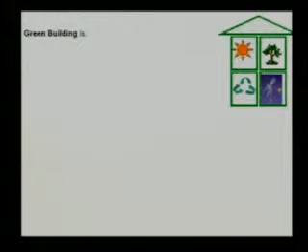That's not the same as green building. Green building is increasing the efficiency of building resource use, that is, using less energy to do the same thing, less water, reducing the impacts on health and environment through the life cycle by improving siting, design, construction, operations, maintenance, and removal. In other words, green building is only one part of sustainability.

The big dog, the 600-pound gorilla in the United States, is USGBC. They have the LEED certification system. It covers a number of different types of certification. The one most relevant, surprisingly, is new construction for the repair industry. One might think existing buildings, operations, and maintenance. That's not really true. That deals more with how the building operates as it goes along, less to do with changing things in the building, which is what we do with repair. Again, they deal with sustainable sites, water efficiency, energy, innovation in design.

Bear in mind, LEED from USGBC is a green building certification system. It's using strategies that are designed and built to improve the performance. And concrete is a pretty darn green material when all comes down to it.

Portland Cement Association put together this nice little summary. We create sustainable sites with concrete. We have good thermal mass and infrared reflectivity characteristics. We can use a lot of recycled materials. We produce it locally, and we are extremely good at durability in that it doesn't rust, rot, burn, survive floods, and vermin don't get at it very easily.

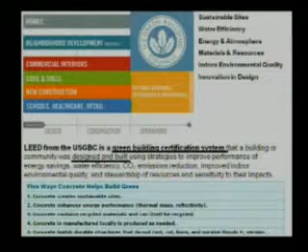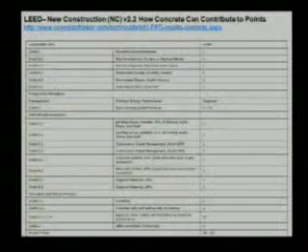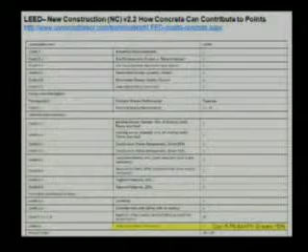These are good things, but if you look at the LEED certification system for new construction, and this is my opinion, not that of my employer or anyone else, if you use a LEED accredited professional, you get 1 point, but the use of a LEED system, LEED certification, tends to increase the construction cost 5 to 7%. On the good side, that has a net present value of greater than 50% after 20 years. It takes a while to get your payback, that's what it's saying.

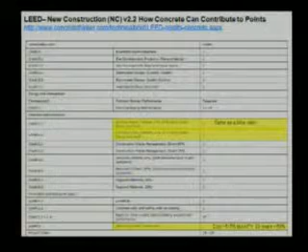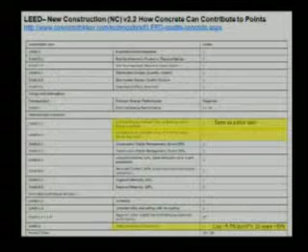I get a point for reusing and maintaining 75% of existing walls, floors, and roofs. I get the same number of points by putting in a bike rack. I can get another point by reusing and maintaining 95%. Durability, I can get 1 point for durability. That's the same as putting in showers in a changing facility.

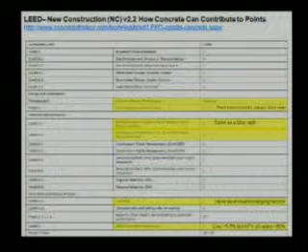Let's see, energy performance. They do give points easier for renovation than for new construction. This is good, and you can get up to 10 points. By carefully managing construction waste management, diverting 50% of it for reuse, you can get the same number of points as you do for using renewable resource wood.

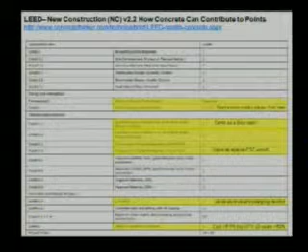And if you apply for credits demonstrating technical performance, you can get 2 points. But bear in mind, you're dealing with another bureaucracy that's always changing its rules. It's not to bash LEED. It's a good system. It's just not especially favorable for the repair industry.

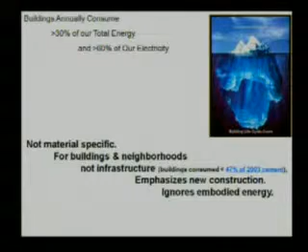Buildings do consume a huge amount of our energy, even more of our electricity. LEED is really for buildings and neighborhoods. A lot of our concrete goes into infrastructure, which it really doesn't address directly.

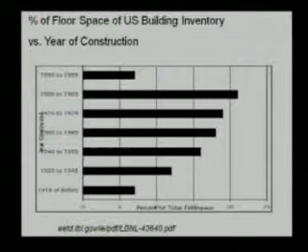Looking at buildings, the percentage of floor space of the U.S. building inventory, that's how many structures are built, how many buildings, versus the year of construction. We built a lot of stuff that's still around in the 80s, a lot of stuff still around in the 70s and in the 60s. In other words, there's a lot of older structures.

How do they consume energy? This gets really interesting. I know this is a busy little table, but heating, cooling, ventilation, and so forth. Well, back in 1920, they didn't use a lot of air conditioning, so they're very efficient when it comes to cooling. You opened a window. Heating, a lot of them used oil heat, less efficient.

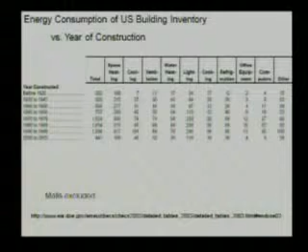And this excludes malls. But if you look at the energy consumption, this is graphing out the totals from the chart in trillions of BTUs versus the age of construction. The energy hogs were built in the 90s, the 80s, and the 70s. In other words, older structures don't always consume a lot more energy.

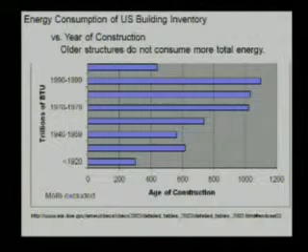Another way of looking at it is delivered energy. This comes from a different source, so the numbers don't exactly align. And throughout the presentation, I've included a lot of links. If you want to go check the facts, if you want to go do your own research, this is an encouragement to do so.

The million BTUs per square foot versus the year constructed. Again, it comes back to the energy pigs are right in here. That's showing it graphically. Until we get to the year 2000, buildings built prior to 1960 tend to be more energy efficient.

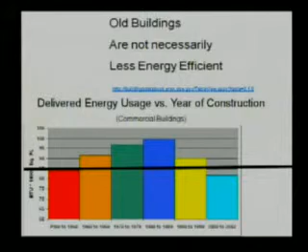Historic preservation. There's a lot of very interesting facts about this. I highly recommend reading a book, The Economics of Historic Preservation by Donovan Rypkema. You can get tax credits for doing historical restoration. You can increase the property values. It's more labor intensive. It's more specialized to do historic restoration than new construction.

Higher skills are required. Guess what? The folks that are doing that are spending the money in the community where they're doing it. They're local labor. So you get a big bang for helping the local economy. You also can create the opportunity for heritage tourism. When you go somewhere on vacation, do you go look at the latest and greatest, newest shopping mall? Maybe you do, but you also tend to look at the things that were built 200 or 300 years ago. That's what's interesting.

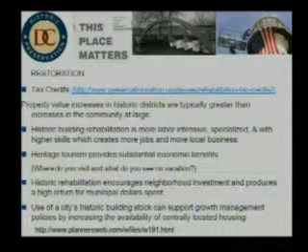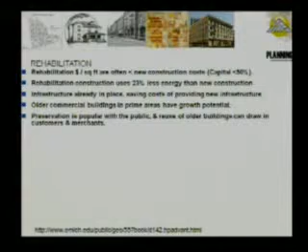There's a high rate of return for doing historic rehabilitation. Furthermore, rehabilitation in many senses is less dollars per square foot than new construction costs. It tends to use less energy than new construction, according to the University of Michigan. Your infrastructure is already in place, so you're not having to replace sewers and electric lines, water supplies, roads. Preservation's popular with the public. It's easy to get tax dollars voted for it.

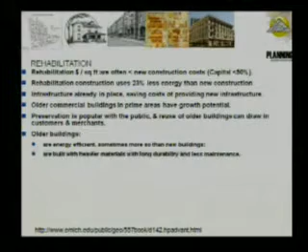Older buildings are more energy efficient. They're built with heavier materials, and they've survived the test of time. They've been there a while. It means that design worked. And a lot of other facts. It instills pride. It saves on maintenance costs, especially longer term.

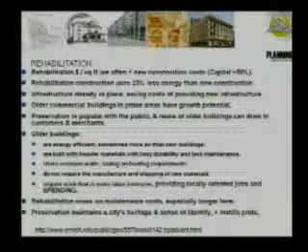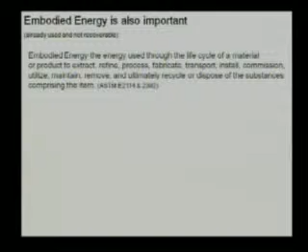Switching topics, embodied energy. Anybody know what embodied energy is? Okay, Mr. Armbruster? It's the energy that went into and is in effect there in that building. Yes. Fancy definition, to say what you said very elegantly, sir, is it's the energy used throughout the life cycle of a material. That's mining the ore, refining it, processing it, fabricating building components, getting them to the job site, installing them, commissioning them, utilizing them, maintaining them, removing them, and disposing or recycling of them when everything's done. That's right from ASTM.

Different kinds of buildings have different amounts of embodied energy. This site, thegreenestbuilding.org, has a lot of very interesting facts about embodied energy. But laboratories, libraries, hospitals, the more durable structures have a higher amount of embodied energy. That's not too surprising. Whereas residential construction has a lot lower. You build it out of wood.

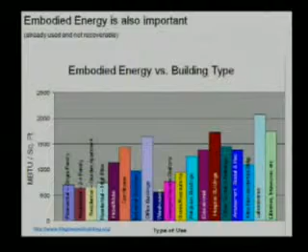Going through this example with a 100,000 square foot high-rise apartment. I chose this example because it's probably built out of concrete, if you're building something like that. Well, the calculations on the model show 74 million MBTUs. I'm just going to call it 74 million MBTUs for the sake of not having to deal with exponents or millions of millions and so forth.

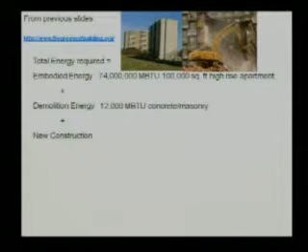Now the model calls out demolition energy separately. To tear down a concrete structure of that size takes 12,000 MBTUs. And let's say we build it back about the same way: 74 million MBTUs to build it back. You can argue that new construction methods may use less energy or more energy, but let's just assume it's in the same ballpark. That's 148 million MBTUs to tear it down and replace it, and the embodied energy in the structure.

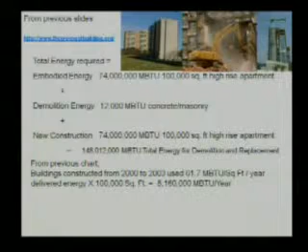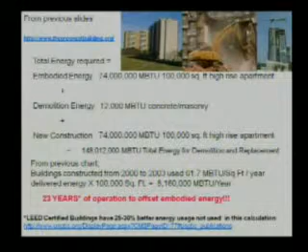Going back to the previous chart, buildings constructed from 2000-2003 was the most recent that I had figures for. They used 61.7 MBTUs per square foot per year. So that translates to 6 million MBTUs per year. I calculate then it takes about 23 years of operation cost to get back the embodied energy in that structure. Bear in mind, LEED certified buildings have 25 to 30% better energy usage, not used in these calculations. I didn't make that assumption.

The most sustainable building may be the one that's already built. As I said, utilities and services are already there. Energy has already been used to fabricate the components. That is, I burned a lot of gas to fire that brick. If I throw that brick in the dumpster, there's no way I can ever get the energy back to make it again. If I can reuse it, I don't have to burn more oil or gas to make more bricks. I don't have to take the energy and dispose of it. And I don't have to fabricate new components.

We talk in energy savings a whole lot about windows. Now, this is the American Concrete Institute, ACI International, so we don't talk about windows. But if I look at new windows, they're double glazed, filled with argon gas, having an aluminum frame and a polyurethane gasket inside. An old window has a wooden frame and is a panel about 8 by 10 inches. The new window is a panel 4 foot by 6 foot. Somebody throws a baseball through it. I can replace that one little bitty panel a whole lot easier than I can that great big panel.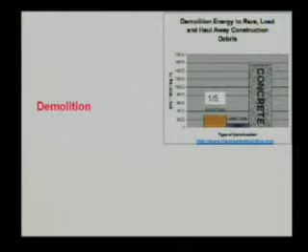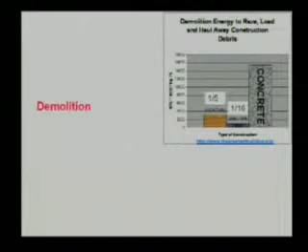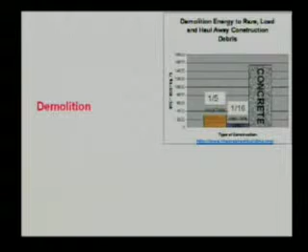Demolition. Like I said, the model calls out demolition separately. Let's just look at how much energy it takes to tear down a concrete structure. To tear down a wood structure, the site tells me it takes 1/5 the energy. It takes 1/16 the energy compared to a concrete structure to tear down a steel frame structure. Unfortunately, the model doesn't go into a whole lot of detail as to how they got those figures that I could find.

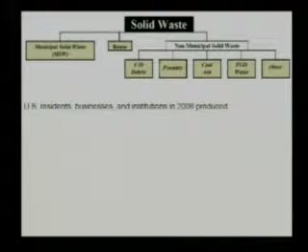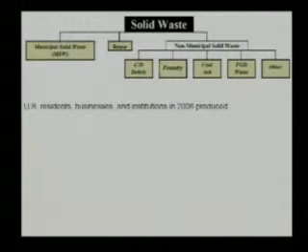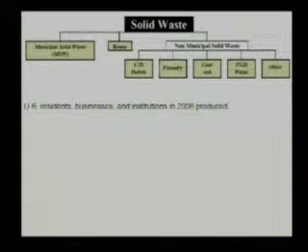Solid waste. One of the interesting facts about solid waste: municipal solid waste, MSW, that's the stuff that's in your trash can Monday morning for the dumpster to come and pick it up. All kinds of figures about that, all kinds of compositions and what we throw away and how that volume is changing. This stuff, non-municipal solid waste, I found it really, really hard to find information on it. It consists of construction and demolition debris, foundry waste, coal ash, think fly ash, flue gas desulfurization waste, and other kinds.

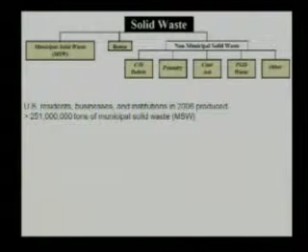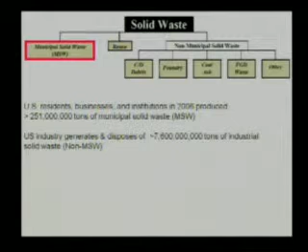Easy to find the figure: we produced 251 million tons of municipal solid waste in 2006. However, the hard figure is industry generates and disposes of about 7.6 billion tons of industrial solid waste per year. According to the EPA, non-municipal solid waste is more than 30 times that of municipal solid waste.

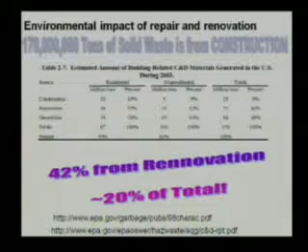The environmental impact of repair and renovation: statistics show 170 million tons of solid waste is from construction activity. 42% of it comes from renovation. 20% of the total of construction and demolition debris is from our industry, folks. Of this construction demolition waste, 44% is from renovation, whether it's residential or non-residential.

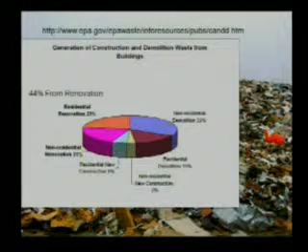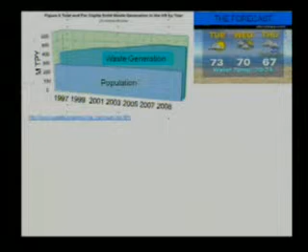What's the forecast? Here's the population growth in the U.S. from 97 through about 2010. There's the waste generation. We're getting a little more of it all the time. We're doing better at recycling, but total waste is growing. That's total solid waste. Furthermore, the amount of built space in the U.S. is going to grow from the 300 billion square feet of space, structures, buildings that we had in 2000 to about 430 billion square feet by 2030.

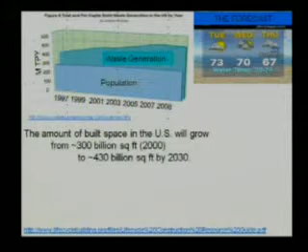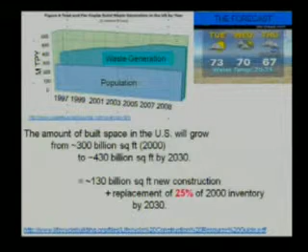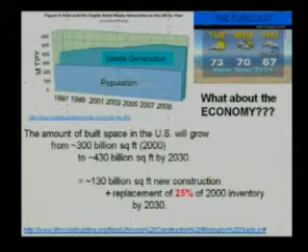Of that growth, that amounts to 130 billion square feet of new construction and replacing 25% of our existing building inventory during that time period. We're going to tear down a heck of a lot of the stuff that's standing. But the economy has a big factor in this too. Remember, we're in a recession, depression, something like that.

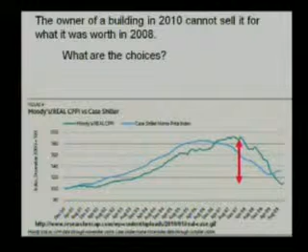Okay, I got a building worth $10 million in 2007. Today it's worth $6 million. What do I do? I maintain, repair, restore it. We're in a growth industry. Running some figures on that. Two-story office building, 83,000 square feet. Granted, it's clay brick. That's where I found the example.

$16 million replacement cost. And if you calculate that out, it's right about in the middle of what commercial building estimates to be costing. I'm not an engineer. I don't build things. Tell me if the figure's right, wrong, or in the ballpark. But about $200 a square foot. Same building, a 50-year maintenance or repair cost summary shows replacing it $16 million, keeping it maintained is $11 million.

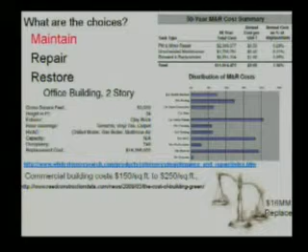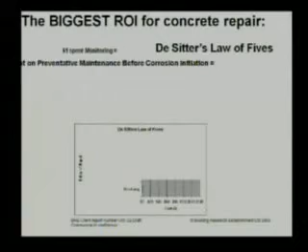The biggest return on investment for concrete repair? De Sitter is an interesting guy. I think he's a professor over in Denmark. Came up with this law of fives, which is just really, really elegant. He says if I invest $1 monitoring a structure, that corresponds to $5 invested on preventative maintenance before corrosion starts, or $25 spent on repair after localized corrosion initiation, or $125 spent after I see spalling and leaking rust out of cracks.

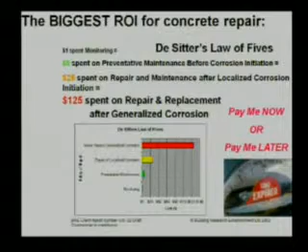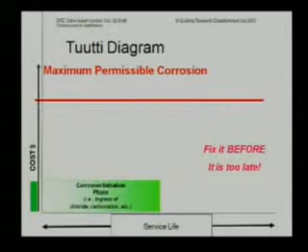Many of you are more familiar with Tuutti, Swedish professor. He says if I fix things during the corrosion initiation phase, it's got a lower cost and a longer lifespan than waiting a while. And doing nothing at all is the highest cost with the shortest lifespan. Good news of that, here in the concrete repair industry, that gives us a whole heck of a lot of job security.

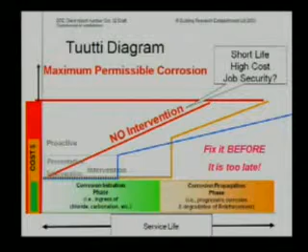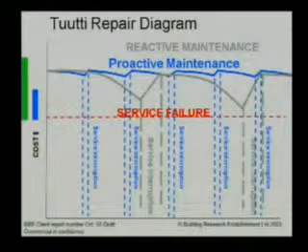Tuutti also says if I look at service failure, when do I do my reactive maintenance? If I do it infrequently and very disruptive, as I take a long time to do major repairs, I have a very long period of service interruption and a higher cost than doing a little bit along proactively, and the total amount of time for service interruption is really shorter. I can sneak in, do a few things on the weekend instead of waiting until it's really bad and having to shut it down for 3 or 4 months.

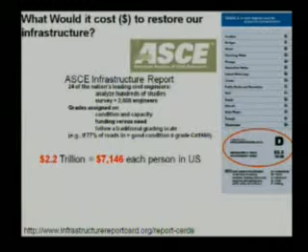How much is it going to cost to fix our infrastructure? Many of you are civil engineers. You're probably familiar with the report card that says $2.2 trillion to bring our infrastructure back to as good a shape as it was in 1980. Well, that's $7,000 a person if I divide that out by the current population of the U.S. That's not making it like new. That's just as good as it was in 1980.

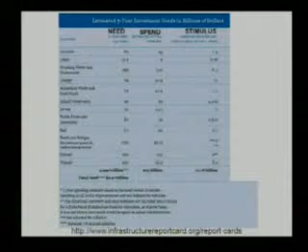Oh, so the stimulus is going to bail us out. We've pumped a lot of money into that, right? Well, there's my $2.2 trillion. We plan to already spend $903 billion on our infrastructure. The stimulus is projected to pump $71 billion into that. It still makes a shortfall of $1.1 trillion. It's a drop in the bucket for what we need to do.

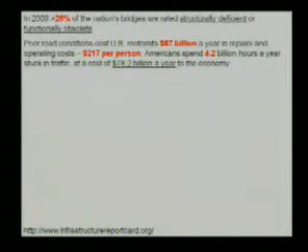What do we need to do? 26% of our bridges are structurally deficient or functionally obsolete. Go talk to somebody in Minneapolis about that. Poor road conditions cost us $67 billion a year in repairs. We spend 4.2 billion hours a year stuck in traffic. That costs us $78 billion a year to the economy and lost productivity.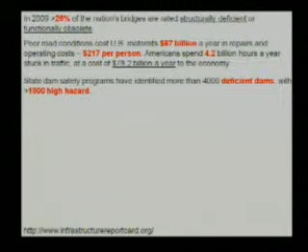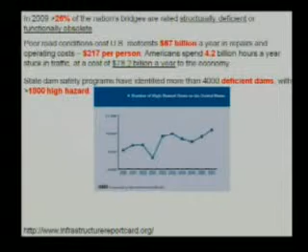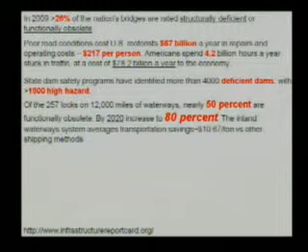Hope you don't live downriver from a dam. There's 4,000 of them that are deficient, and more than 1,000 of them are high hazard, and they're going bad faster than we're fixing them. Locks and waterways: 50% are currently functionally obsolete, projected to grow to 80% being obsolete by 2020. Yet transporting materials by barge saves us an average of $10 a ton versus other shipping methods. We're not necessarily maintaining and fixing the things that are saving us money.

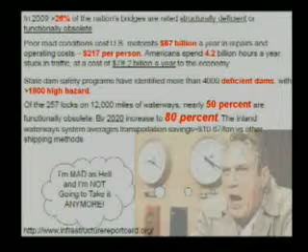Back in the 70s or 80s, there was this wonderful movie called Network. It's about a network broadcaster that goes totally insane on the air and he starts shouting, 'I'm mad as hell and I'm not going to take it anymore.' It's kind of how I felt when I saw these statistics.

Vision 2020 says the annual cost to owners for repair, protection, and strengthening is between $18 and $21 billion a year in the U.S.

Why does concrete fail? The 3 D's: design and construction errors, deterioration, and damage. They all work together.

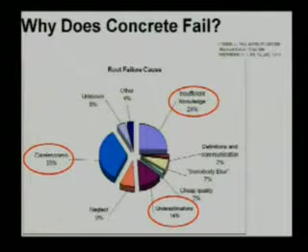A study by ACI, granted it's from 1979, the most recent information I could find, identifies the big 3: insufficient knowledge, carelessness, and underestimations. It's one way of looking at why we're here, to try to learn, to try to fix this issue.

Another way of answering the question, why does concrete fail: concrete itself fails because of mechanical issues, chemical issues, physical issues, and fire.

The other biggie is reinforcement corrosion, carbonation, chlorides, and other bad things getting into it, and stray currents.

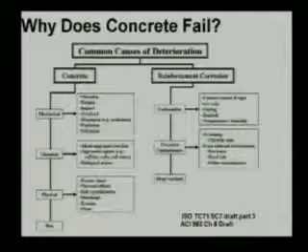How many repairs fail? This is a quote from the U.S. Army Corps of Engineers, REMR CS2: a little more than 50% of the repairs performed on Corps structures are performing satisfactorily. They don't feel it's that unusual.

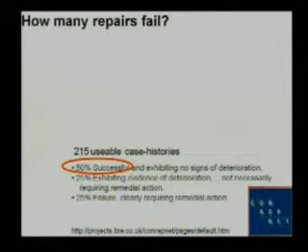How did they fail? The biggest problem was cracking. Corrosion, debonding, and alkali aggregate reaction were other factors.

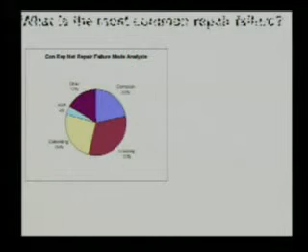That's kind of the chicken and the egg. Does corrosion cause cracking, or cracking cause corrosion? Don't debonding and cracking kind of go together? The first thing I see with AAR is usually the cracks.

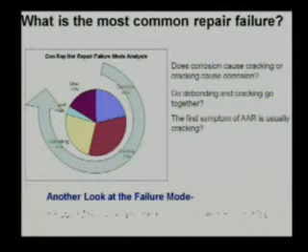Improved technology: back in the stone age, way back when, we built things out of wood, mud. We know a lot about doing that. We know a lot about building out of stone, a lot about building out of masonry, and a whole lot about building out of steel.

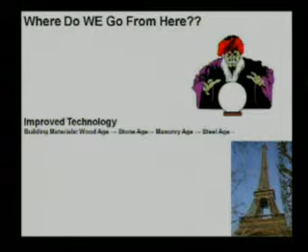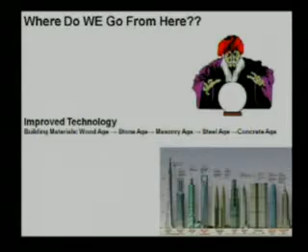Yet today we're in the concrete age. Our tallest buildings are made of concrete, our longest bridges are concrete, our largest dams are concrete. Yet the amount of knowledge we have about it as a construction material is still growing. We're still learning new things every day. There's a lot of room for improvement compared to our competition in building materials.

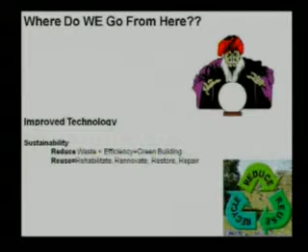Sustainability: reduce waste, improve efficiency, that's green building. Reuse: adaptive reuse of structures, deconstruction of existing structures, salvaging building components. Renovate, rehabilitate, restore, and repair, the 4 R's. Recycle: we're learning a lot about cement extenders, about concrete, about adaptive reuse.

Concrete repair is a growing business, and we live in very exciting times.

The construction industry itself is changing. Back in the good old days, it was design-bid: engineer a set, draw up a bunch of plans, call up contractors, see how much it's going to cost to build it this way. We're now in design-build, working together to come up with a solution.

A lot of newer things involve putting in a maintenance plan. The biggest bang for the buck if you have a new structure is to put in a maintenance plan and follow it, doing that proactive maintenance.

When we start building new reactors, nuclear reactors, we better be thinking about how to take them apart when we're done with them too. It's one of the problems our forefathers passed along to us. Where we would really like to get to is design, build, maintain, and rehabilitate—plan for what you're going to do with the structure when you're done with it.